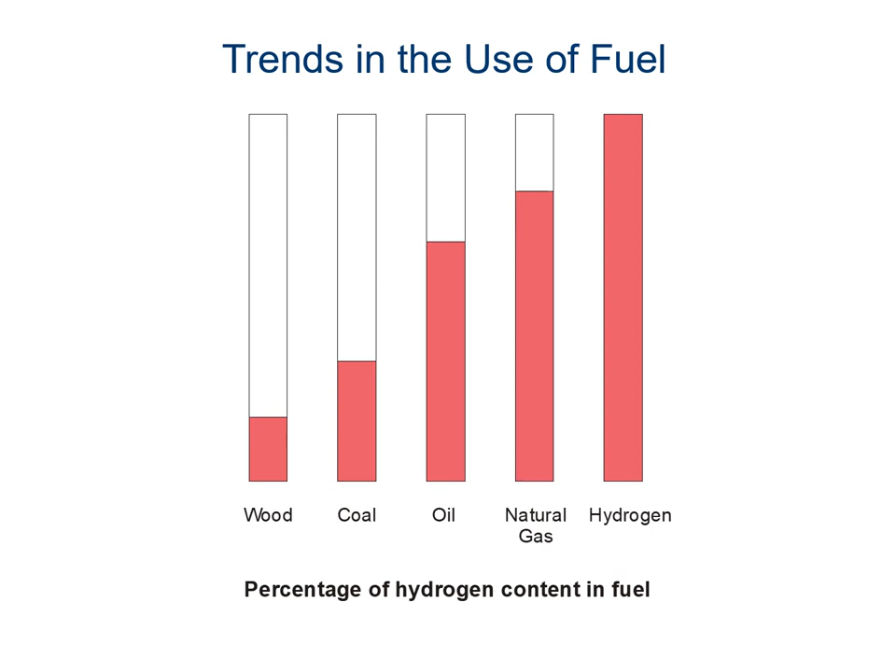Two principal reactions in the burning of a hydrocarbon fuel are the formation of water and the formation of carbon dioxide. As hydrogen content in the fuel increases, the formation of water becomes more significant, resulting in proportionally lower emissions of carbon dioxide.

A wide range of organizations, from energy companies to automobile manufacturers, are working to develop the fuel cell and the accompanying infrastructure. A trend in the production of power is clearly visible. In the 19th century, there was the steam engine. In the 20th century, the internal combustion engine. The 21st century may be the fuel cell.

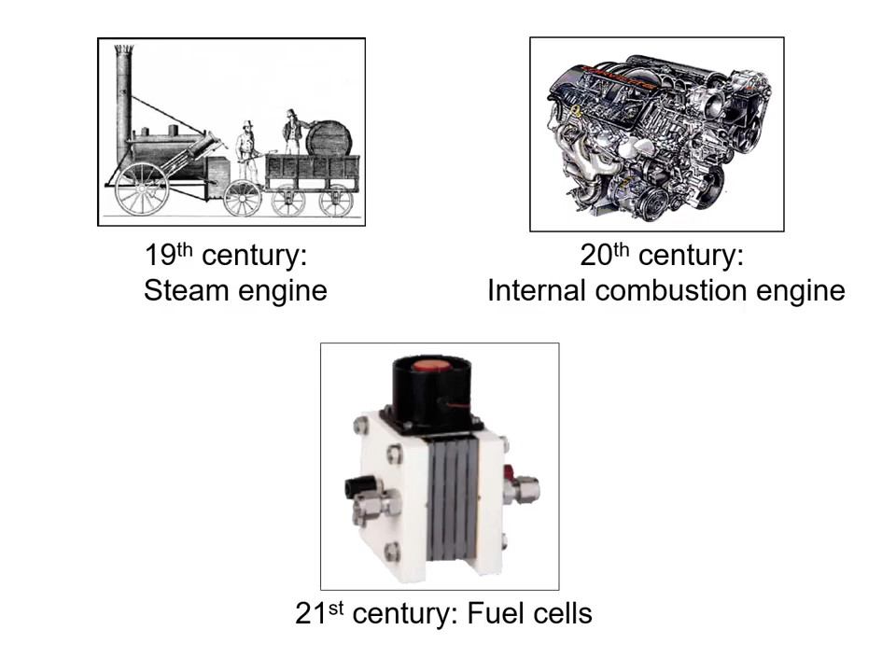The fuel cell was developed in 1839 by Sir William Grove, a British scientist and lawyer, by accident. He was performing an electrolysis experiment. He disconnected the battery from the electrolyzer and connected two electrodes together. He noticed that the current flowed in the opposite direction, consuming the gases, hydrogen and oxygen.

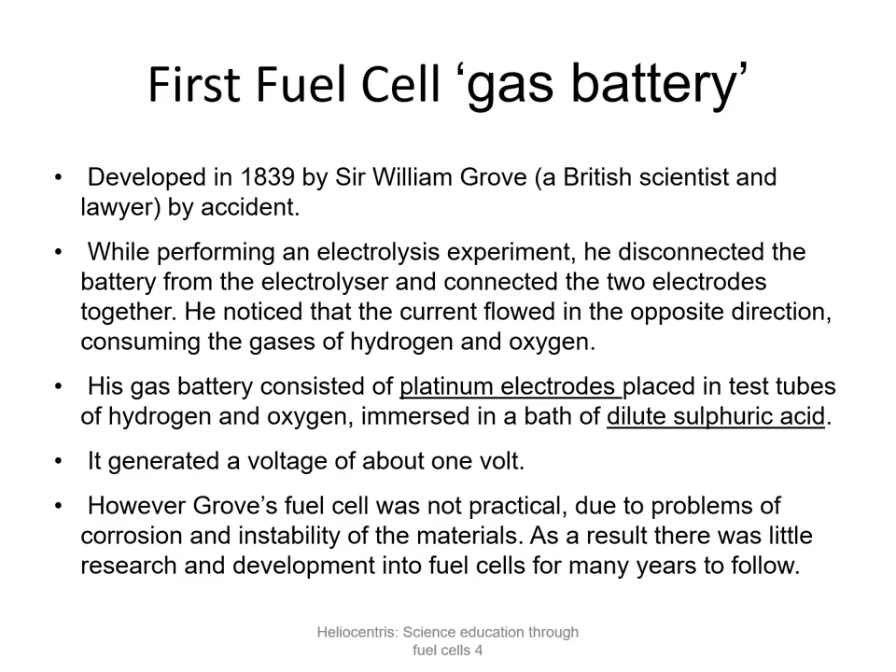His battery consisted of platinum electrodes placed in test tubes of hydrogen and oxygen, immersed in a bath of dilute sulfuric acid. It generated a voltage of about 1 volt. However, Grove's fuel cell was not practical due to problems of corrosion and instability with the material. As a result, there was little research and development into fuel cells for many years to follow.

Here you can see on the left his electrolyzer where he had the battery hooked up, and on the right he had taken out the battery and left the two probes connected, creating that gas battery.

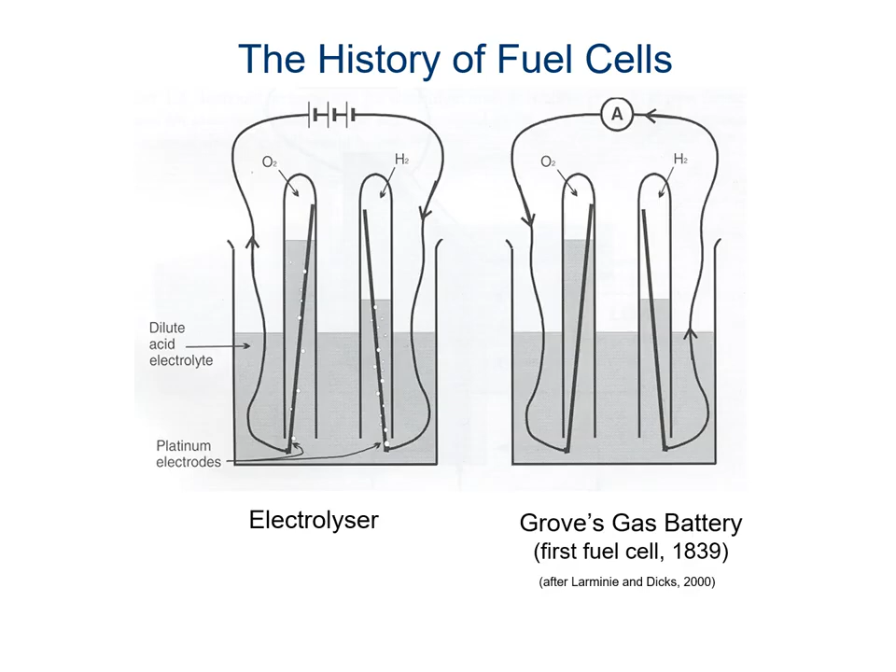The next fuel cell was Francis Bacon's. He was a chemical engineer at Cambridge University. He began his work around the 1930s. Somewhere in the 1950s, he successfully produced the first practical fuel cell, an alkaline fuel cell.

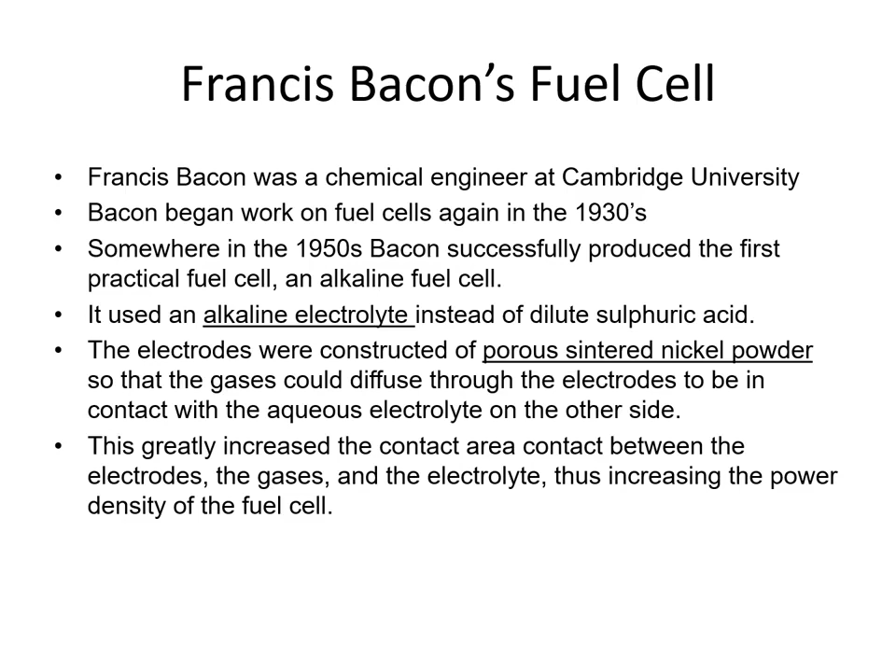In the 1960s, NASA started using a modification of Bacon's fuel cell. They realized they could use it to supply drinking water on board as well as electricity for the Apollo space missions. They used an alkaline fuel cell that is still used today in the Space Shuttle Orbiter. It produced 12 kilowatts of electricity, weighed 202 pounds, and occupied a space of 4.6 cubic feet.

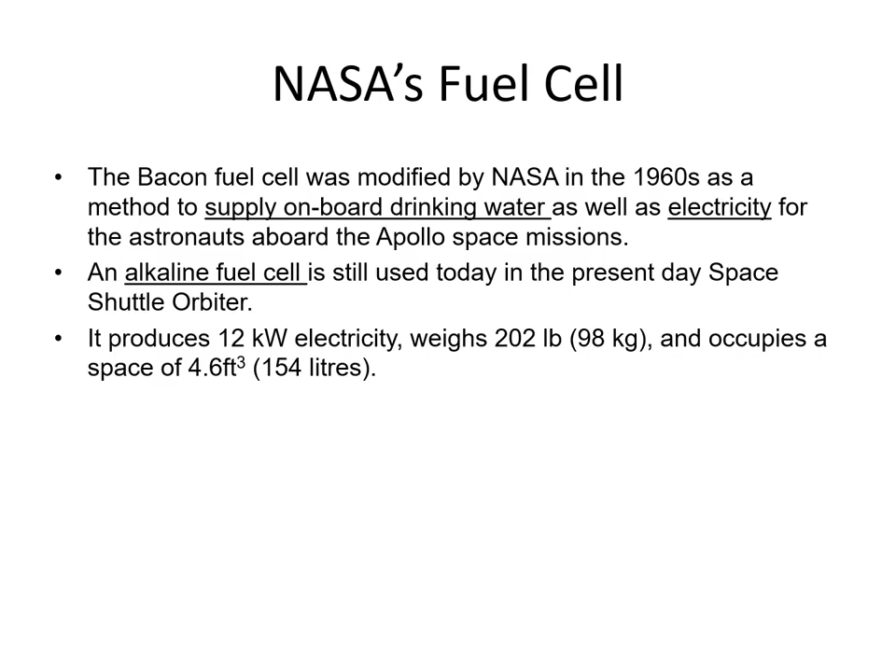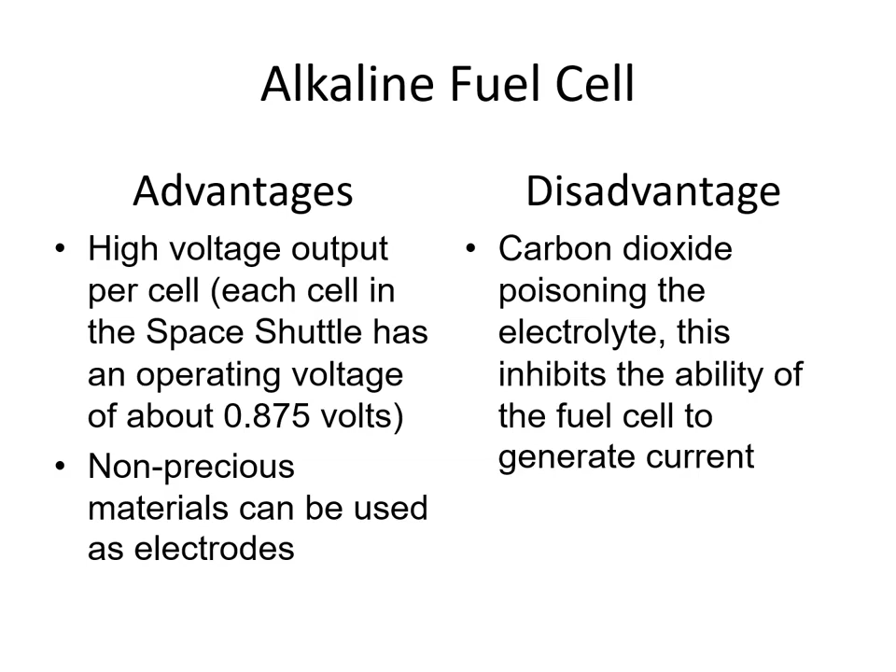Fuel cells are classified by the type of electrolyte they use. The different electrolytes operate at different temperatures. Low temperature fuel cells include the alkaline fuel cell, the polymer electrolyte membrane, and the phosphoric acid fuel cell. All of these fuel cells use hydrogen as a fuel. This hydrogen can be extracted from natural gas, biogas, methanol, or propane by the process of reformation. Hydrogen can also be created through electrolysis of water.

The high temperature fuel cells include the molten carbonate, solid oxide, and direct methanol. These fuel cells offer the advantage that they can use either natural gas or untreated coal gas as a fuel directly without use of a reformer, through the process called direct internal reforming.

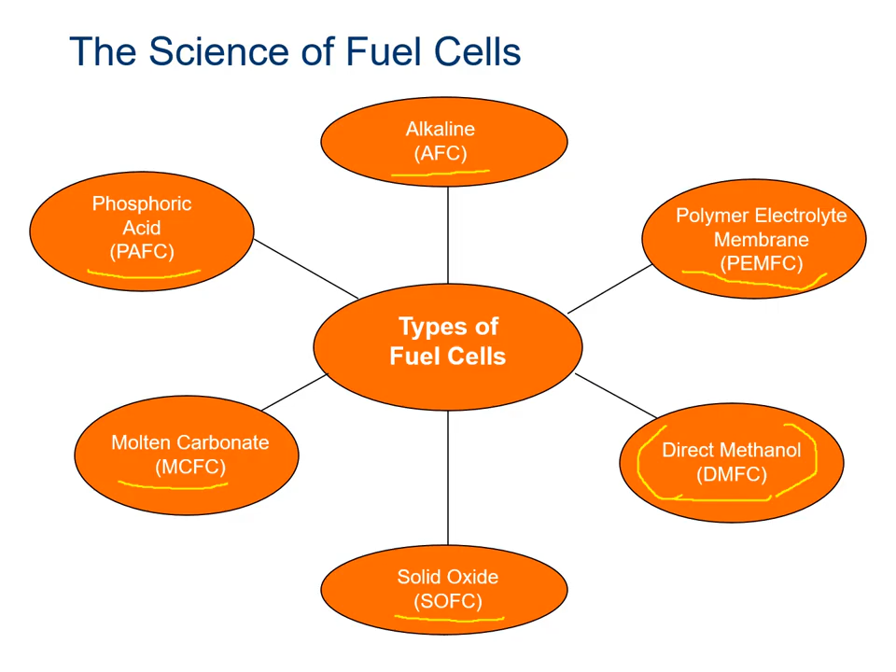A sixth type of fuel cell is the direct methanol fuel cell. It is also a low temperature fuel cell, but it can use methanol as a fuel directly without needing reforming. The primary limitation of the direct methanol fuel cell is that the rate of reaction on the anode is very slow. This results in a very low operating output voltage. For certain applications, the direct methanol fuel cell may be ideal.

In the mid-1980s, Ballard Power, based in Vancouver, British Columbia, and working with a contract from the Canadian Department of National Defence, made significant breakthroughs in the fuel cell. Working with Johnson Matthey in the UK, they developed the PEM fuel cell, which has had a significant increase in power density. From the breakthrough, it was recognized that fuel cells could be made small, powerful, and inexpensive enough to replace conventional power technologies.

California's Low Emission Vehicle Program, a program of the California Air Resources Board, has been a large incentive for automakers to develop fuel cell automobiles. This program requires that, beginning in 2003, 10% of passenger cars delivered for sale in California must be zero-emission vehicles, called ZEVs. Automobiles powered by fuel cells meet these requirements.

To date, 7 of the world's 10 leading auto manufacturers plan to introduce fuel cell automobiles in the 2003 through 2005 time frame.

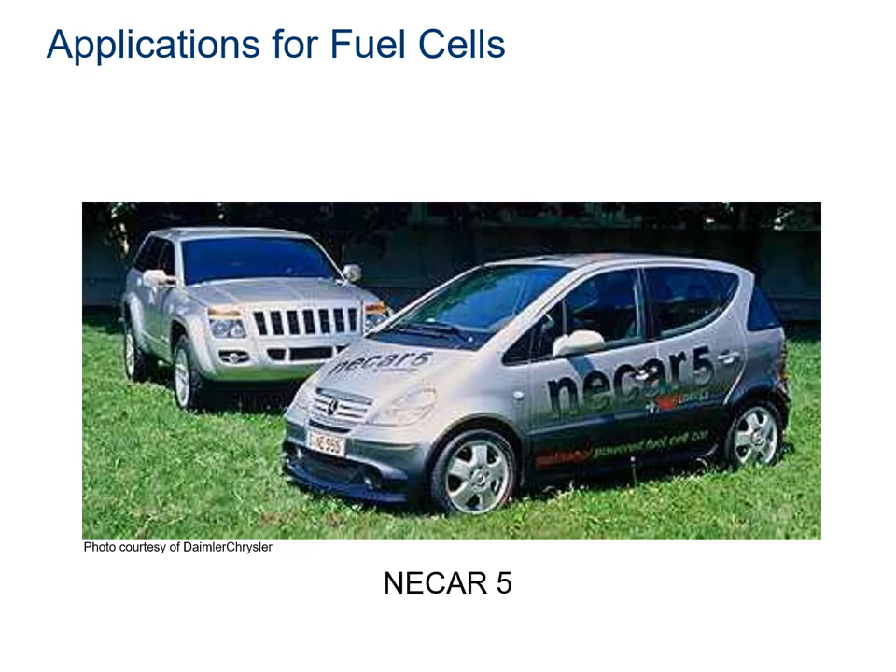Electrical energy demands throughout the world are continuing to increase. In Canada, electrical energy demand is growing at an annual rate of approximately 2.6%. In America, electrical energy demand is growing at a rate of about 2.4%. In developing countries, electrical demand is growing at an annual rate of almost 6%. How can these demands be met responsibly and safely?

There are many problems associated with the building of new power plants, both financial and environmental. Fuel cell distributed power stations provide a solution. The fuel cell distributed power plant can provide high quality, reliable power. Depending on the type of fuel used, fuel cell power plants produce little to no emissions.

Shown here is a prototype fuel cell distributed power plant recently developed by Ballard Power. This particular unit was commissioned by BC Hydro Grid and provides 250 kilowatts of electricity, about the same amount of heat, fueled by natural gas. This is enough power to provide heat and electricity to a community of 50 homes, for example, or to a hospital or a remote location school. Ballard plans to introduce its first commercial fuel cell distributed power plants in 2003.

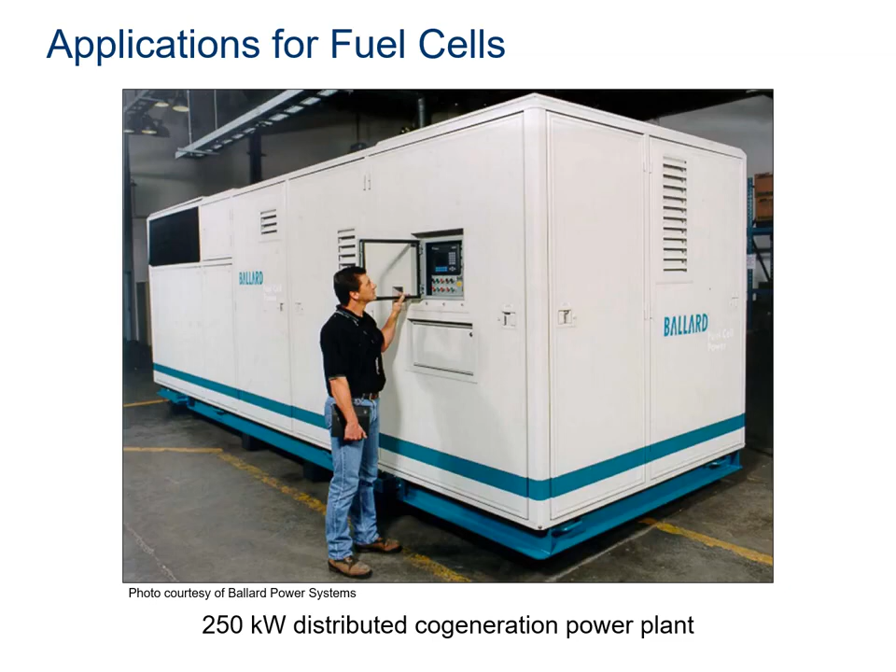Fuel cell power plants are also being developed by several manufacturers to provide electricity and heat to single-family homes. Fueled by either natural gas or propane, these fuel cell plants are able to power a home independent of the grid. Plug Power, based in New York, has developed a new fuel cell power plant that supplies 7 kilowatts of electricity and heat using either natural gas or propane as its fuel. That is enough power to supply the electrical demands of a modern, energy-efficient home.

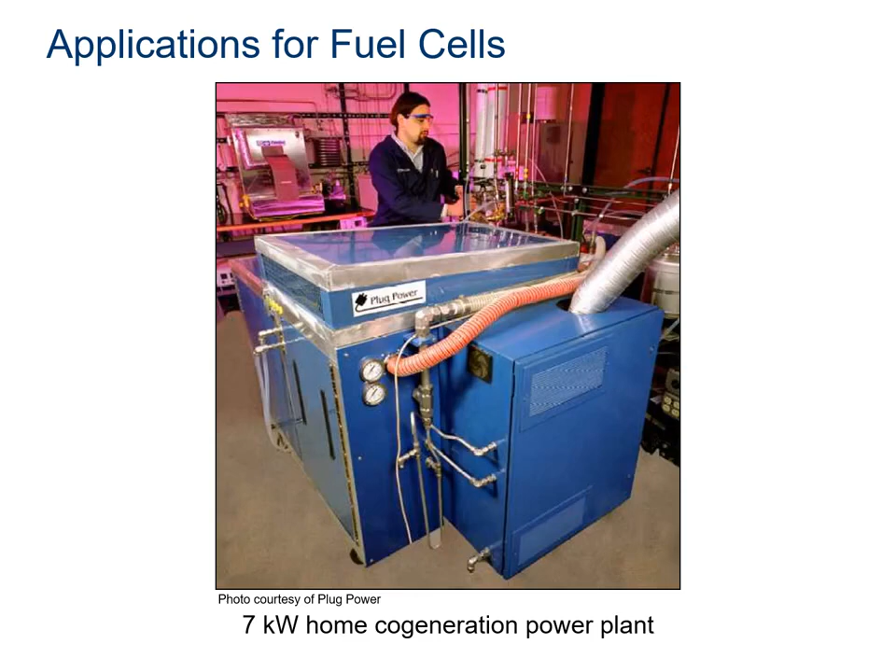Initially, fuel cell power plants will be grid parallel. Eventually, they will be grid independent. Plug Power plans to commercially introduce this home power plant, distributed through General Electric, in 2002. This is a small portable fuel cell that can power up to 50 watts of electricity, portable enough to be used anywhere.

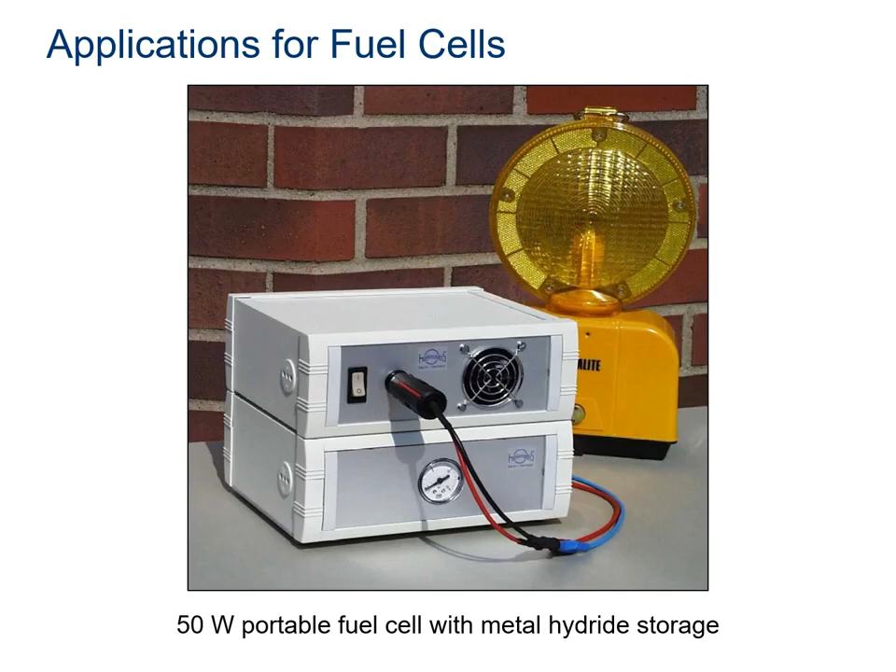A fuel cell is a device that, through an electrochemical process, converts hydrogen and oxygen directly into water. This process produces energy, released in the form of electricity and heat. It is the chemical process of electrolysis in reverse.

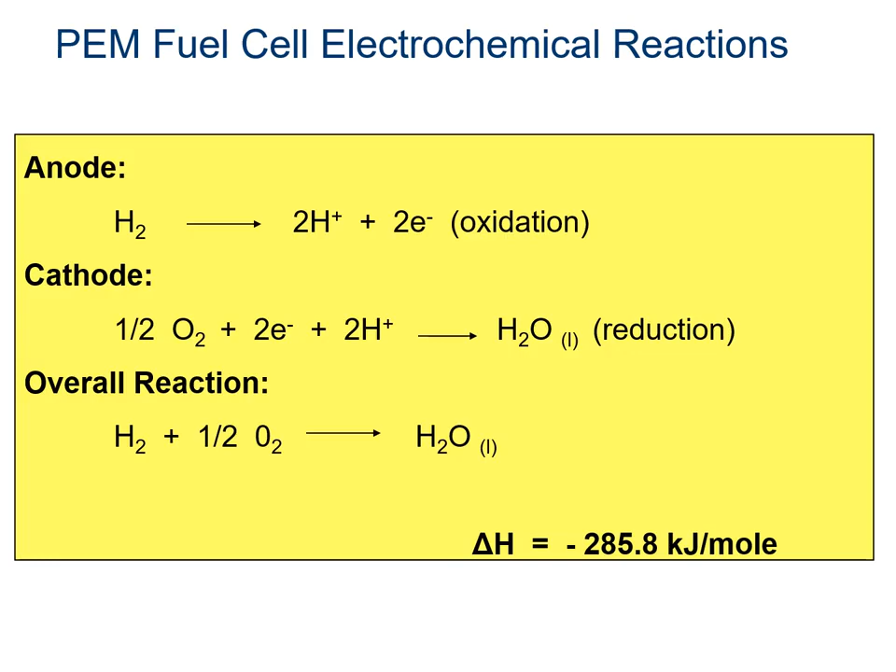Alright, so here is an example of a simple PEM fuel cell. The hydrogen and the oxygen enter through the top. Through the center is our polymer electrolyte that encourages them to combine, forcing the electrons to come up through the load where you need the power and then back out. And your output from both sides is the water. You have an anode on one side and a cathode on the other that encourages that electron flow.

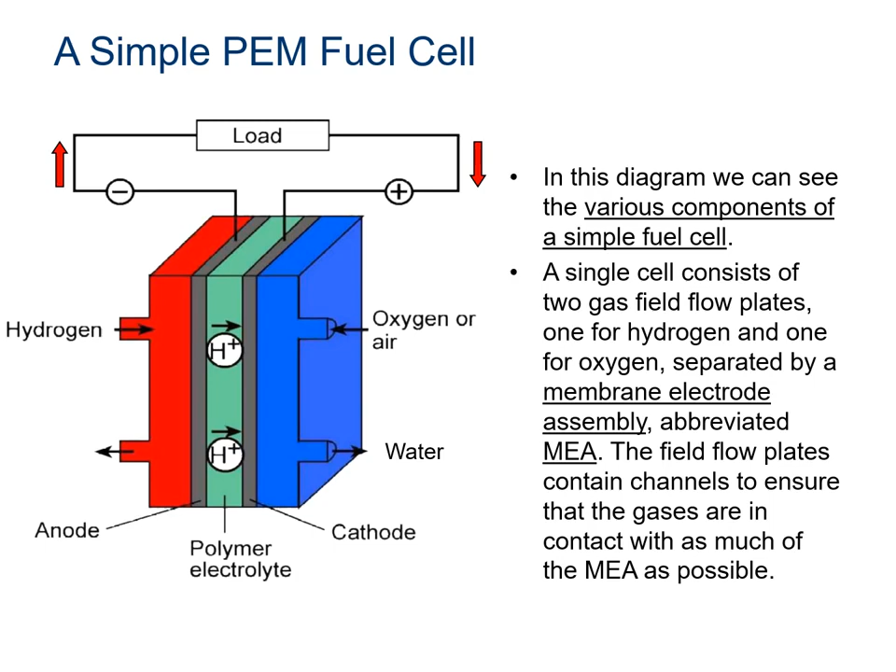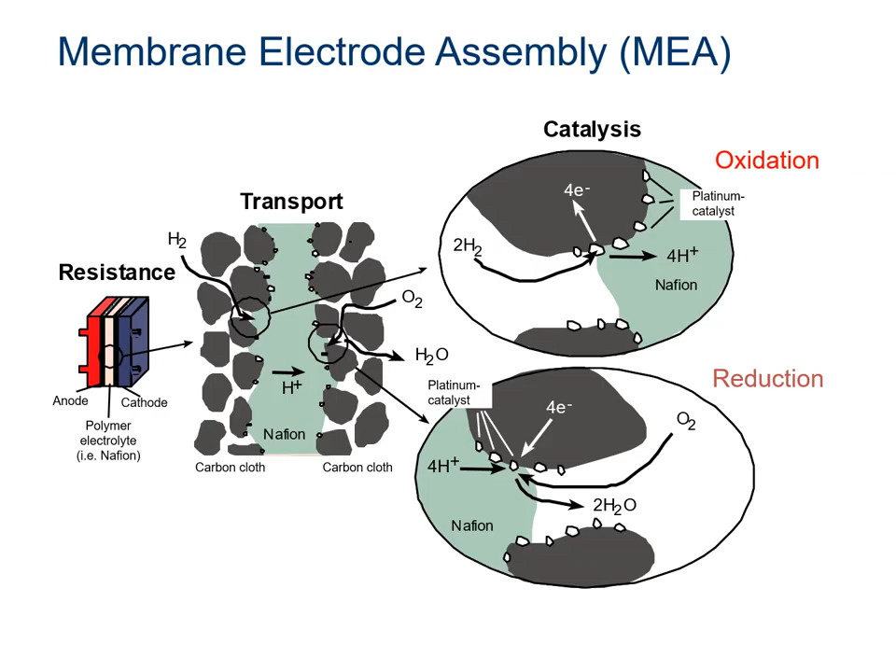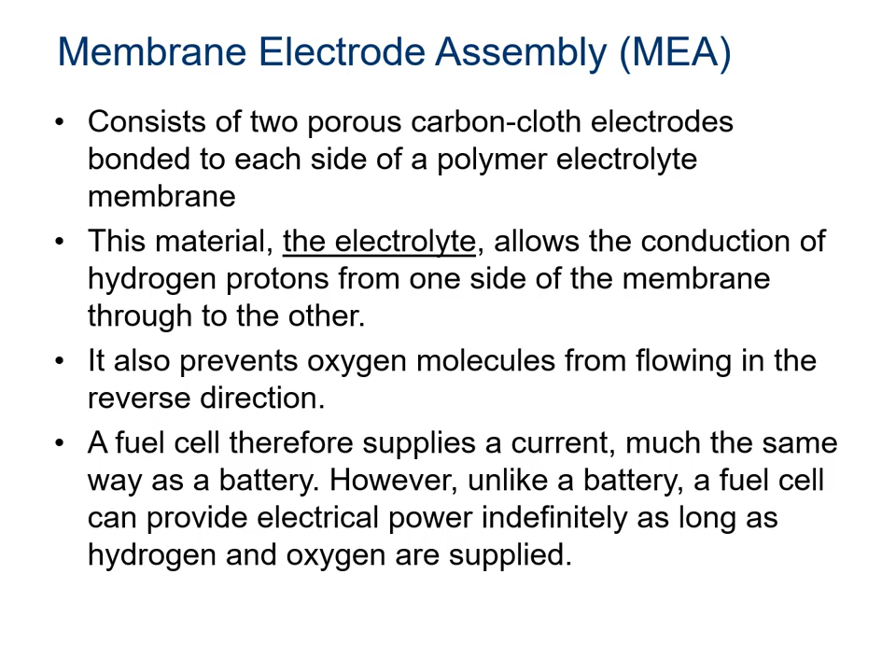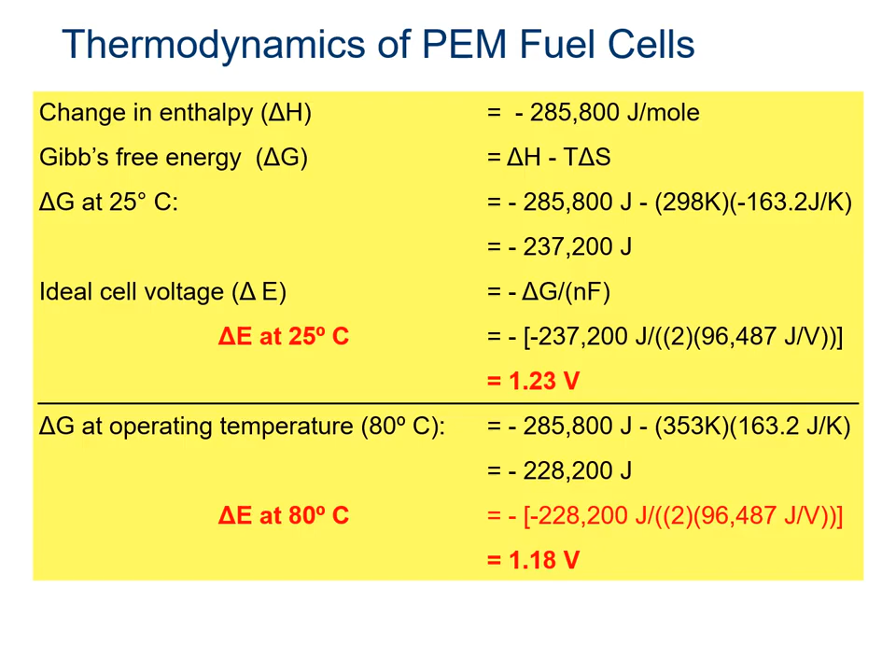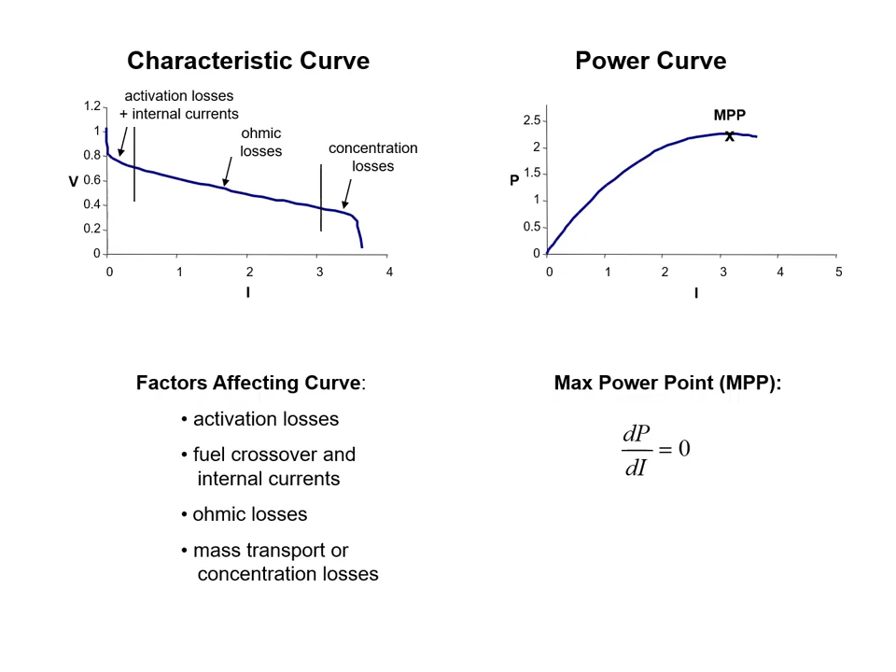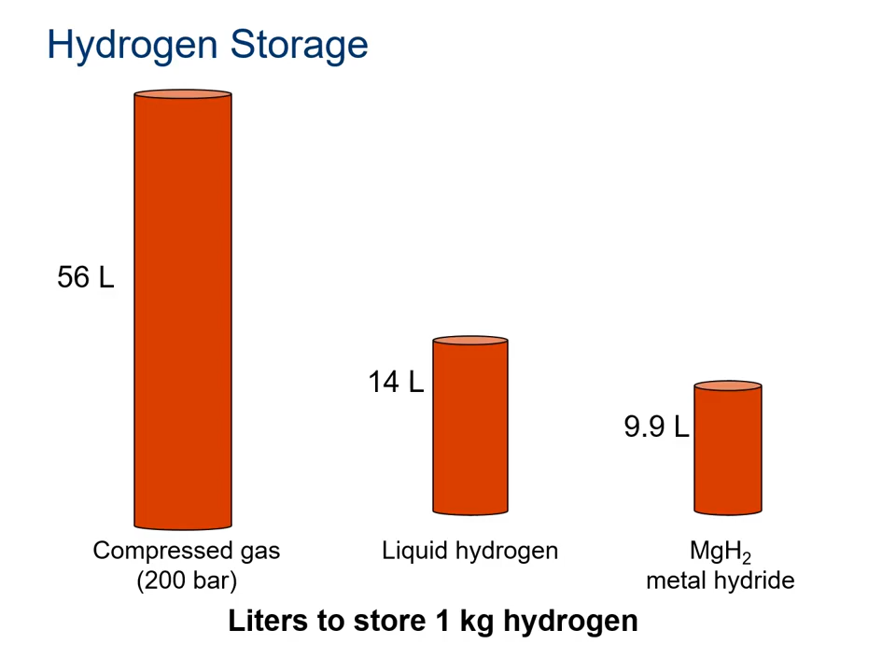Hydrogen storage. If we compress it as gas, it takes 56 liters. If we turn it into a liquid, it's 14 liters. And if you go all the way to a metal hydride, it takes 9.9 liters. You can see the storage reduces obviously by the type. Ways we can get it: fuel tanks using a reformer can give us hydrogen, solar panels and an electrolyzer can give us hydrogen, and there is development into algae to produce hydrogen.